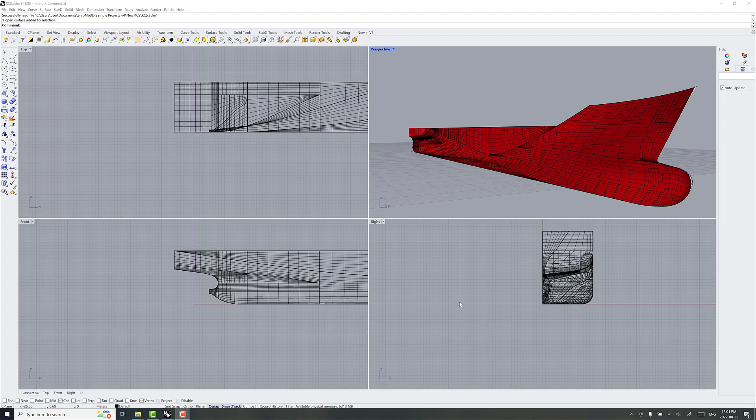Hi, I'm Ryan Nicoll, CTO at DSA Ocean, and today I want to talk about remeshing a ship hull mesh in preparation for import in Shipmo3D.

Previously we've been working with the KCS hull, and we made sure all the normals are facing the right direction. But the thing about the number of panels you're using is that memory use and computational time will increase dramatically with the number of polygons. Shipmo3D also has some limits on the number of polygons you can put in.

So we're just going to quickly show how to do this with Rhino using the quad remesh command. It's a little arbitrary, but we're going to work with the middle section of the mesh. You can see there's a number of sections here in the poly surface, so it's not a mesh yet, this is a poly surface.

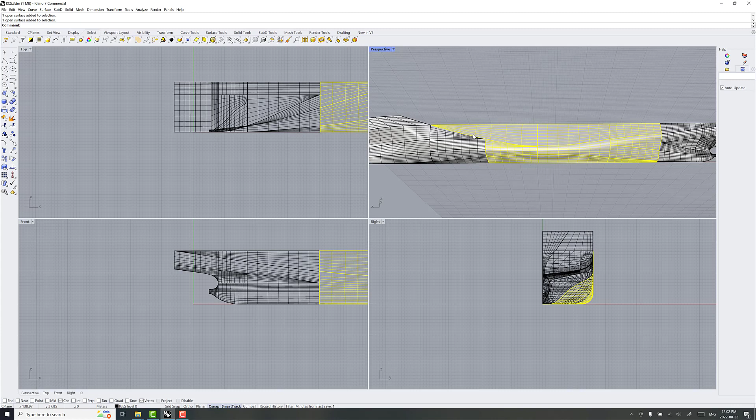That's what we need to use the quad remesh command for. The first thing we're going to do is join all of these sections. I'm holding down Shift and selecting these surfaces, and we'll join them into one entity. That just makes the quad remesh run a little bit faster.

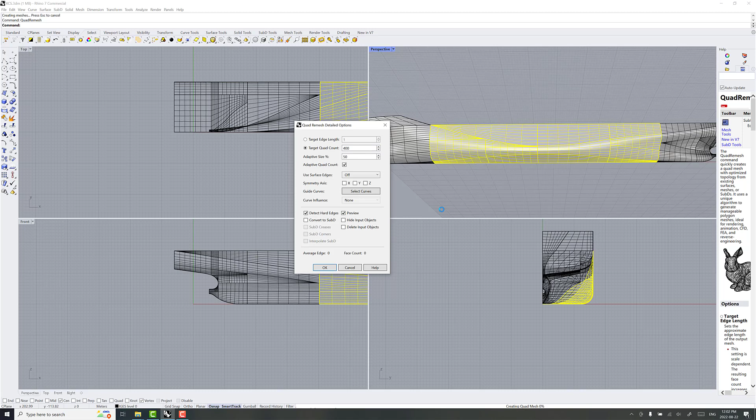Now we can type the quad remesh command, and we're going to aim for about 400 to fill in this whole region. We'll click on preview, which is handy to quickly gauge what's appropriate given how well it fits the surface, and check if anything looks really wrong. Honestly, it's looking pretty good.

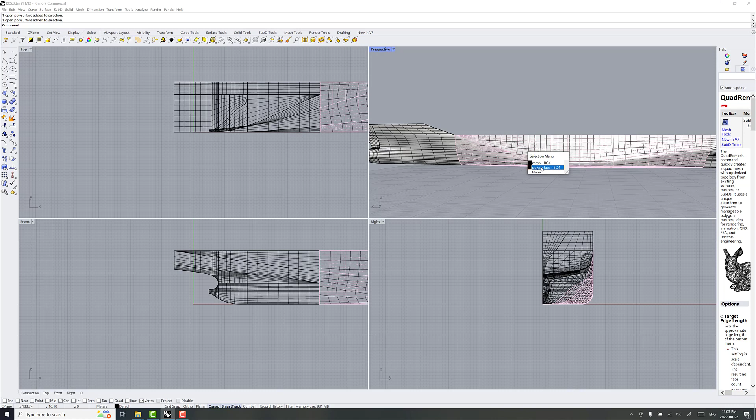So I'm going to click OK, and we should not leave both the poly surface and the mesh in place. We'll click here, and we might need to click once or twice to get the selection menu. I want to select the poly surface and leave the mesh, since that's what we just created. Now you can see we're left with this new mesh.

Now what we're going to do is save this as a new OBJ file. There it is at the bottom. I'll just call it KCS remesh, under our folder. One thing you want to make sure of is that you don't have Rhino Z mapped to OBJ Y. We want to preserve those coordinate frames, and we'll click OK.

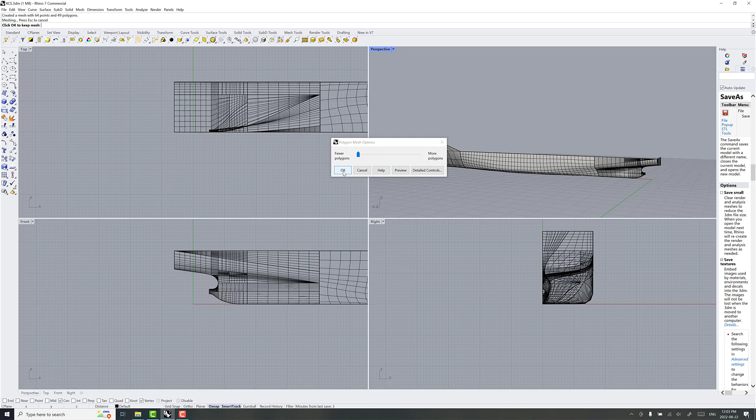You can even preview this and adjust the number of polygons, but I think it looks pretty good, so I don't think we need to make too many adjustments there. You might want to save this as a Rhino file in case you want to come back to it again, but that's optional.

So close that. Now let's make sure we can load this in Shipmo3D. Remember the length between perpendiculars from the previous project. Actually, we'll go to new project, File, New Project, and change the folder to new KCS.

230, and I think the draft was about 10.8. I'm just copying these from the other sample project. So we'll go to Add New Data, Panel Hull, and preserve those numbers there. Here's where we now select OBJ, and we'll go to our new KCS folder. There's our KCS remesh OBJ file. Save and run.

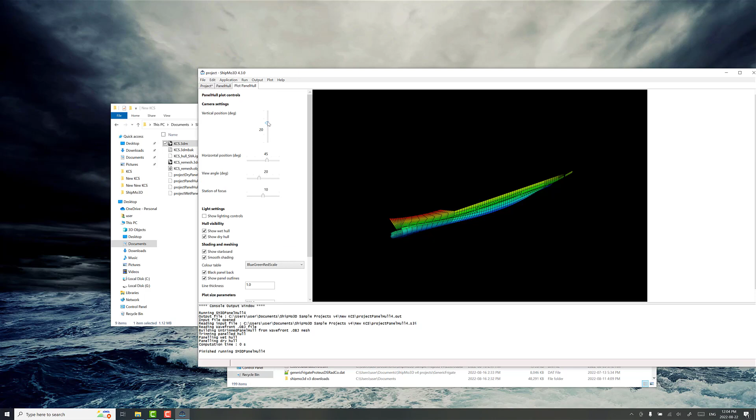Now we'll go to Plot Panel Hull. What I look for now is whether there are any black spots anywhere, whether we missed any normals, and whether it otherwise looks okay. There's a bit of a high number of elements there, but it should be fine.

Also, because of the automatic mesh refinement at the waterline, we just see a little bit of extra stuff along here, but that'll be helpful in the long run. So that's adjusting the number of polygons in your OBJ mesh file for Shipmo3D. Thanks for watching.